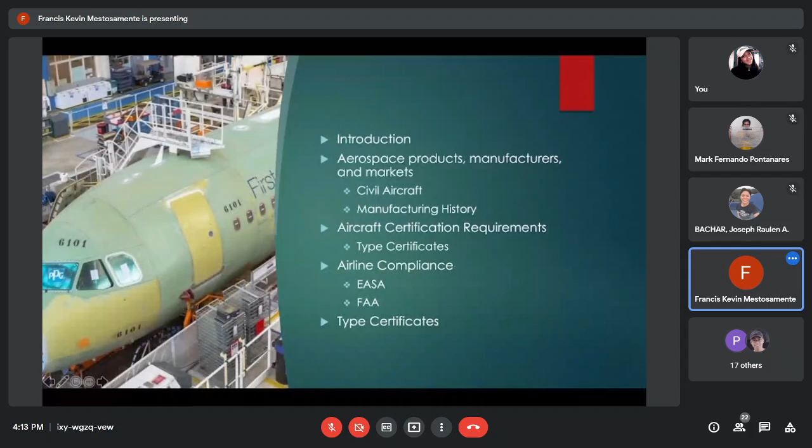We have our next slide here. Basically, we have the introduction focusing on this module - a summary of the current production of aircraft. We'll be focusing on production, specifically production points, in a few main things.

Current innovation of the aircraft - how currently our aircraft evolve. As you could see, our technology is evolving rapidly, especially in our generation.

The current market is also unstable, especially now that we've encountered the pandemic, which is very critical for the aviation industry. And of course, one of the most important factors will be the business model or the demand of the certain company or the certain airline.

So business model varies from company to company. They have their own goals and they have their own processes on how to achieve their goals. And of course, this airline company will take a toll on us or affect the current aircraft production. So the aircraft produced by our production companies will be for our airlines, or specifically, mostly for commercial purposes.

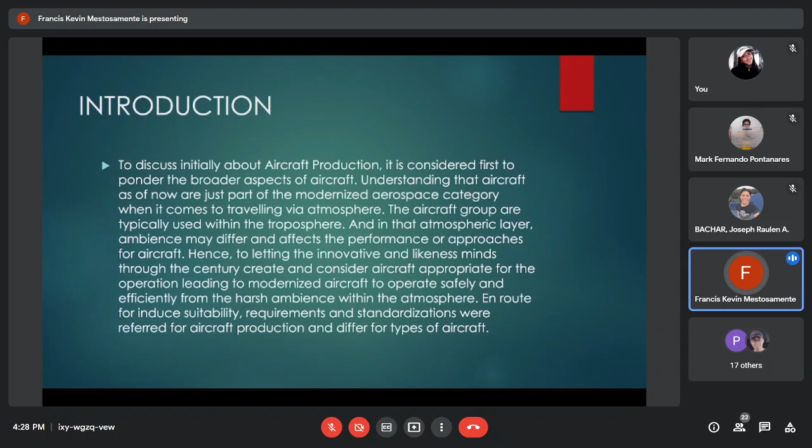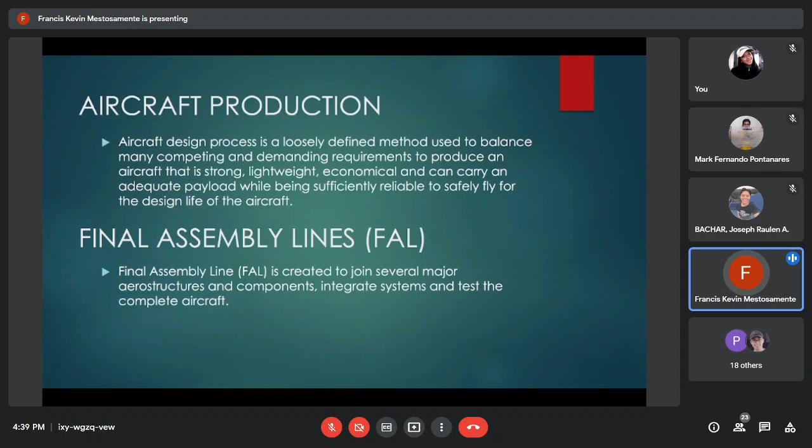Okay, let's take a look at the A350 final assembly line process. We'll be focusing on the final assembly line process, the last assembly line process where they combine the components coming from different factories of Airbus and different warehouses.

The final assembly line deals with fairly large components since it's the last part of the assembly line process. Each part transferred here has its own assembly line process. For example, the wing of the A350 is transferred to the final assembly line, but the warehouse or production process it came from has its own assembly line specifically for producing that wing. Today we'll focus only on the final assembly line process of the A350.

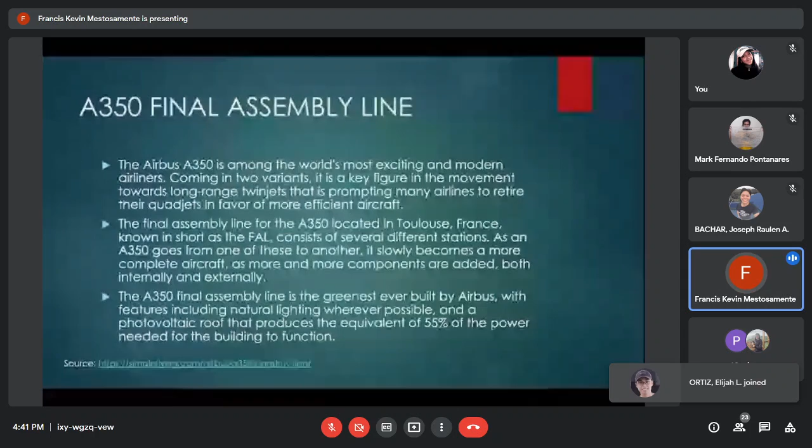The A350 is one of the current trends in aircraft today, one of the more modern aircraft with two variants. It's a huge technological advancement since airlines now favor aircraft with only two engines. Before, large long-haul international aircraft used at least four engines, but today with the A350, the aircraft is much more efficient since we use only two engines for a long range or long haul flight.

The final assembly line for Airbus, and specifically for the A350, is located in Toulouse, France, since the main Airbus company is located in France. It consists of several stations, which we'll discuss in a minute, where components are slowly added internally and externally to complete the aircraft process.

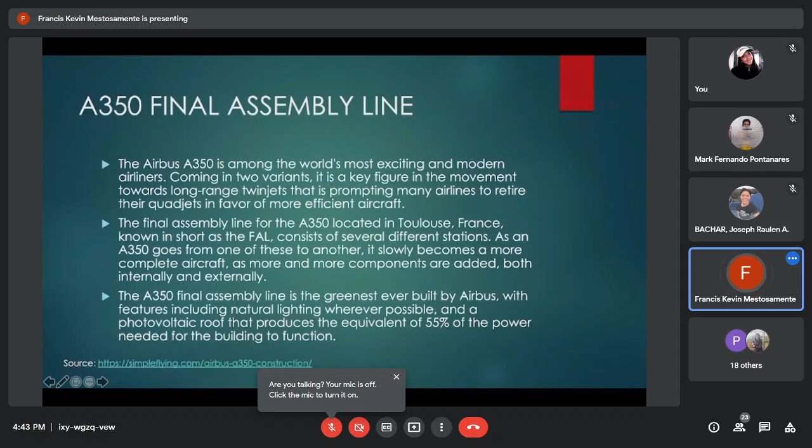Let's take a look at the process of the final assembly line for the A350 so we have a better idea. The A350 final assembly line process starts with the arrival section. In the arrival section, the large components I mentioned will come from different locations and different companies if there are third party companies. This is the first process of our final assembly line.

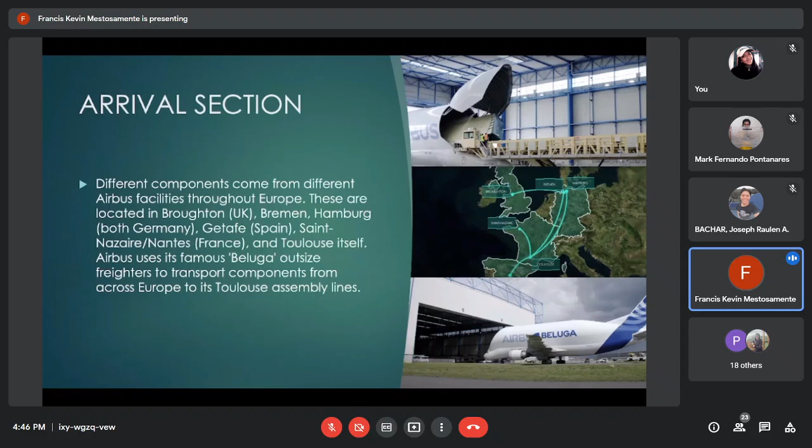We attach several parts of the wing before it is sent down to the final assembly line. So there we go, it's a two-way process. Unlike the others, after their assembly line, they brought it down directly to the final assembly line, or FAL in short, FAL of the A350 in Toulouse.

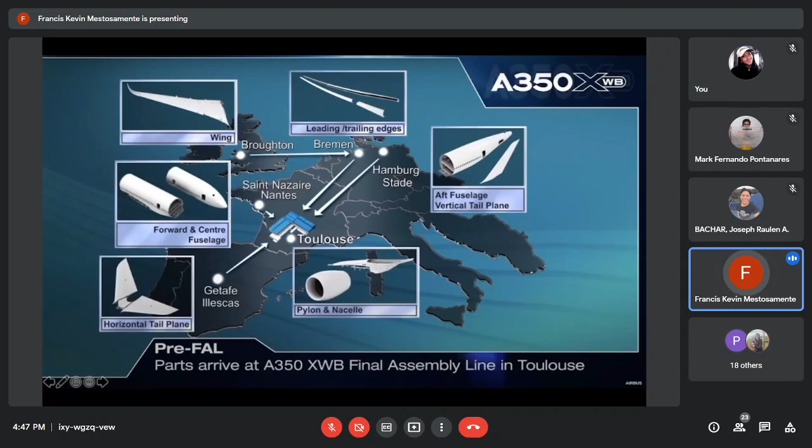Moving to the next slide, our first station for the A350 is where the parts will be passed. The first station will be Station 59. Here we install the modules of the fuselage and/or monuments, and of course the different bigger components of the aircraft.

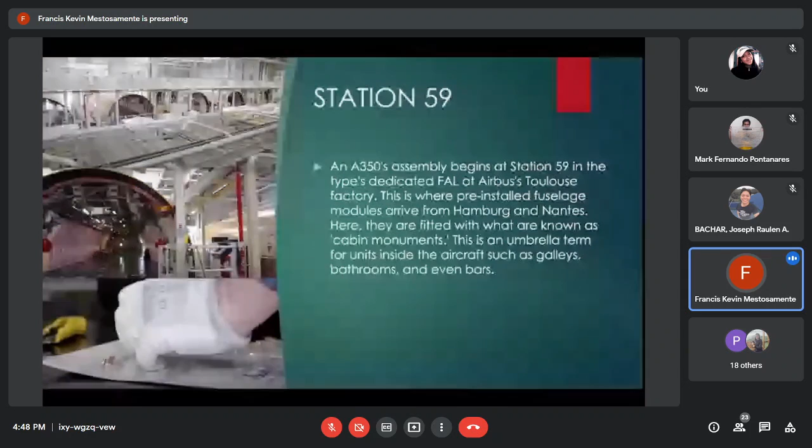What I mean by monuments are the parts specific to that aircraft and specific airline, the large parts of the aircraft that are there permanently. With monuments, these are parts of the aircraft that you cannot dismantle, they are there as a whole. So this is the first thing we install at Station 59.

Their goal, specifically, is the monuments, and the second goal is the outfitting process. The monuments include the galley, washroom, and crew compartments, also the dividers per class of the aircraft. These certain parts are there as a whole and permanently, which is why they prioritize them, putting up the washroom, the whole compartment, first.

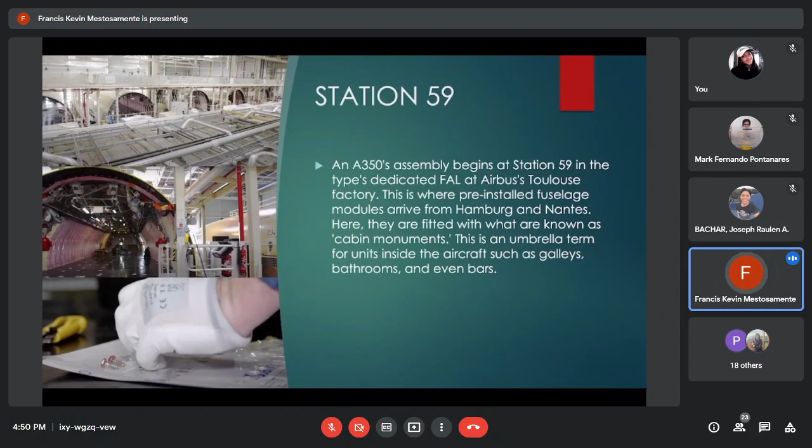Then they will also start the outfitting process. In outfitting, the lines needed throughout the aircraft operation come in. Since these lines will be within the aircraft structures, that's why they come first. The outfitting process includes the hydraulics, water system, oxygen system, air conditioning system, wiring system, and some of the insulation placed on the minor parts. So this is Station 59.

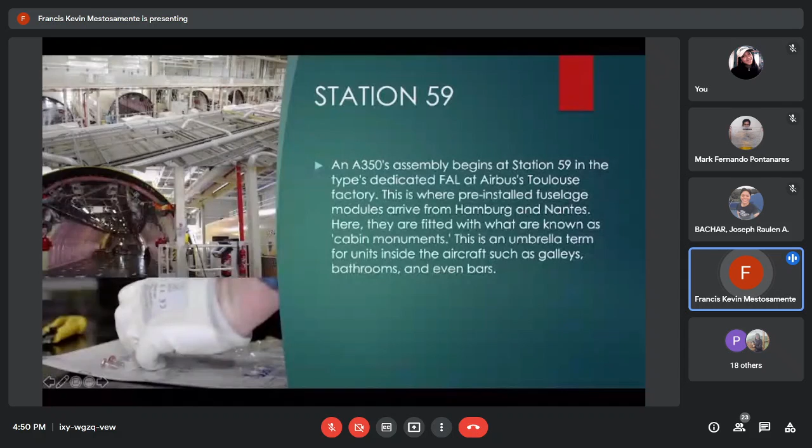Monuments and outfitting process. You can also see here, in the first picture, the fuselages lined up for the outfitting process and monument installation. They do this at Station 59 to be more efficient in producing numbers and to speed up production, with the aircraft arranged in parallel to minimize production time and improve workflow.

So faster processes. In the second picture, we have a quick look at some workers doing the outfitting process on a certain fuselage. Usually it takes 40 workers handling per fuselage on average, and each worker has their own specialty: a team for hydraulics, a team for wiring, a team for the monuments.

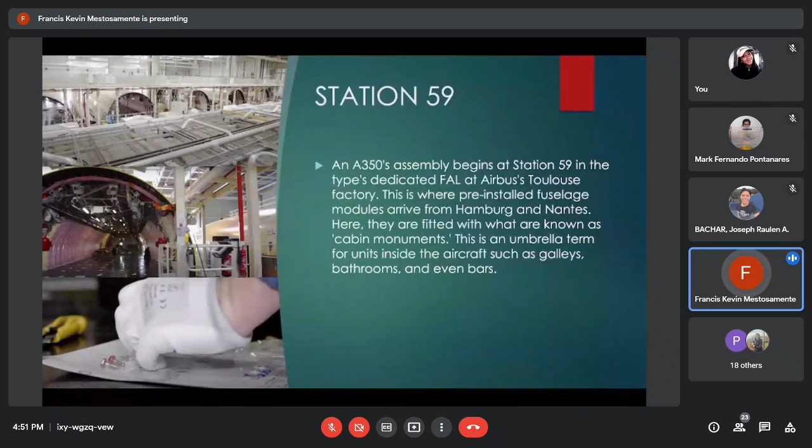So that's Station 59, monuments and outfitting. Cabin monuments installation and the outfitting process. These are the permanent parts where we cannot dismantle the monuments. This is one example of a monument on the aircraft, one of the first things installed, and as you can see, it is there as a whole.

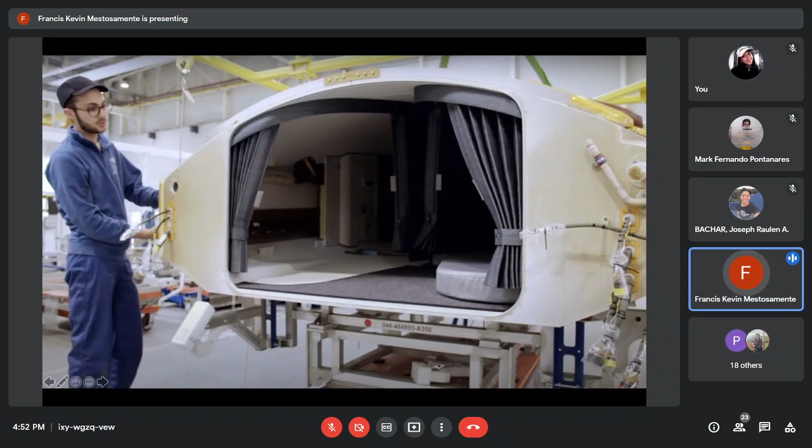We have, I think, a crew rest compartment provided on the top part of the aircraft for long haul flights, since there's a need for crew rotation. The crew who will rest stay here to take a break, to take a quick nap on long haul flights. So this is one example of monuments, installed there as a whole.

Moving forward, we have our next station, Station 50. The major thing they're doing here is the structural fuselage join-up. They combine the three parts of the fuselage: the aft, the forward, and the center, joining up the fuselages from Station 59.

Before they join up the three parts of the A350, the outfitting is already ready. The things I mentioned, hydraulics, water, oxygen, wirings, electrical, are ready by the time they join up. So once joined, the outfitting is also ready as a whole aircraft, and this is where the aircraft takes shape, visibly becoming an aircraft.

Some call this the marriage process, since we combine the three parts of the aircraft: the nose, the mid, and the tail or aft section. The joining is processed by hand and riveted. They use a lot of rivets in the joining process, of course using aircraft-grade rivets, and it's performed by professionals, specialists in the riveting process to form it correctly.

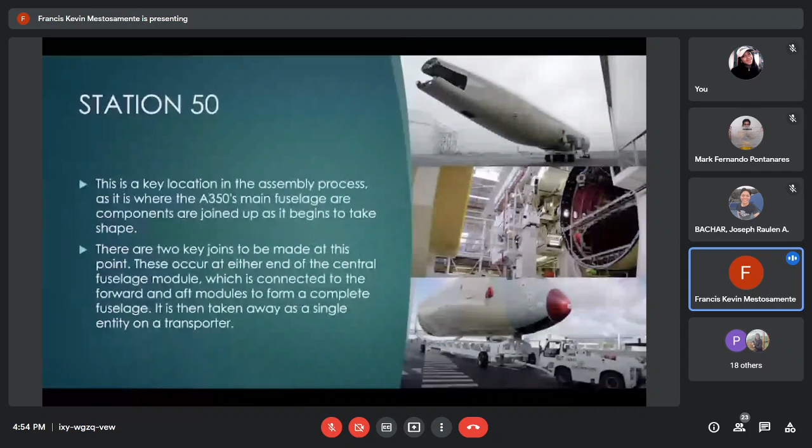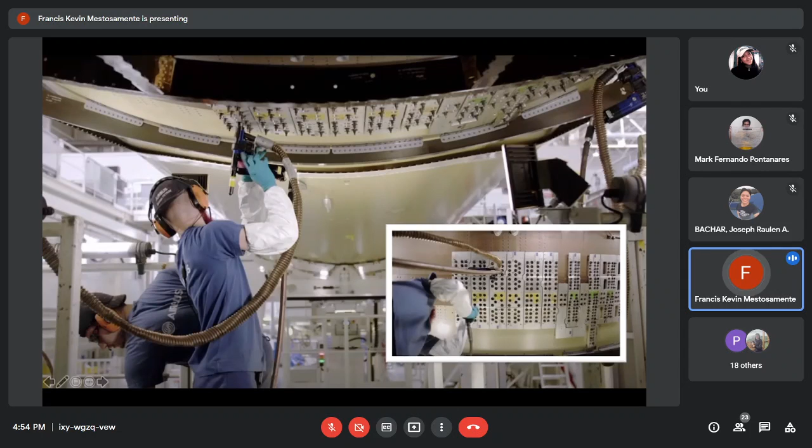So there we have a very big picture here showing two personnel working with the riveting process. As you can see, they process the riveting here at the fuselage join up. You could also see here a different angle.

That is aircraft grade rivet, not the same as the traditional home rivet you see in hardwares - this is a different one. So this team is specialized with the rivet assembly since that minimizes production time, as we are adapting the assembly line process.

Next up will be Station 40, where they attach the wing to the fuselage of the aircraft. I forgot to mention with Station 50, the fuselage joint, they also attach the nose landing gear of the A350. Together with the process, they attach the nose landing gear during the join up of the three parts of the fuselage, so they can tow it to Station 40.

At Station 40, the main thing here is attaching the wing, and this will be the first power on of our A350. With the wing, not only the main wing, but also the horizontal tailplane and the vertical tailplane are attached here. They'll also be attaching the tail cone at the very end of the aircraft. Since the tail cone usually houses the APU, if I'm not mistaken, once they attach the tail cone together with the APU, the auxiliary power unit, they can provide the first power on of the aircraft.

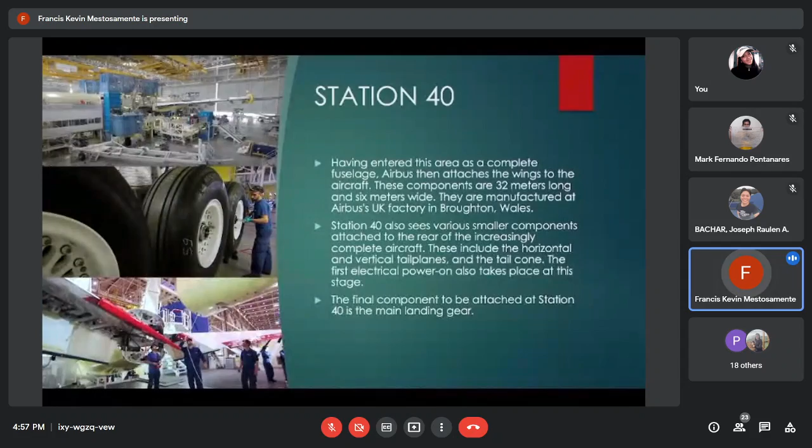Take note, at Station 40, as I mentioned, they attach the horizontal and vertical tail plane. With the vertical and horizontal tail plane - I think I have a picture later - usually the tail plane is pre-painted. With the painting process, they have problems with the height of that specific tail plane, so sometimes they attach it already painted. Take a look at this.

So here you can see the tail plane attached. We already have the tail cone attached, the wing attached on the A350, and you can see the tail plane of the A350 being attached already painted. Since this is the highest part of the aircraft and they have problems painting this part, they pre-paint it before attaching it to the aircraft.

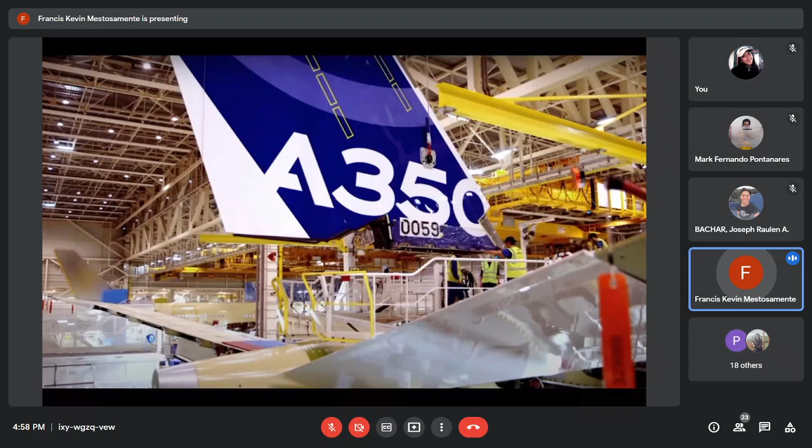And that's it for Station 40 - 90% finished is the aircraft. Next up is Station 30. With this station, the main thing they'll be doing here is the cabin installation.

With the cabin installation, the major focus of Station 30, this team is quite versatile since the cabin installation differs from aircraft to aircraft. Since each airline order has their own cabin configuration needed and wanted, they have their own customization depending on their business model. So at Station 30, what they do for cabin installation varies.

And they have specialists for every task at Station 30. So they have here an airlog center for Airbus, where the interior parts, cabin interior parts, come from - also made from different companies or different countries.

So in this middle picture, that's our example of the airlog center - they'll be getting the seats needed for that certain A350, certain airline, and certain aircraft.

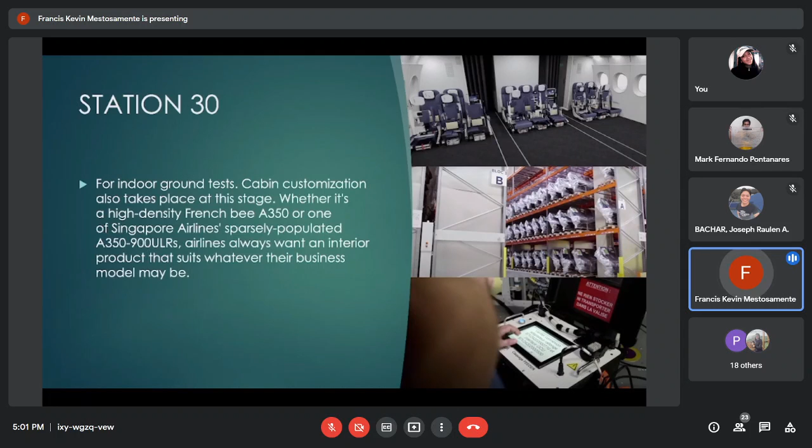Station 18. So with the previous station, first power on, they also perform indoor ground tests since the aircraft already has power. Next up is station 18.

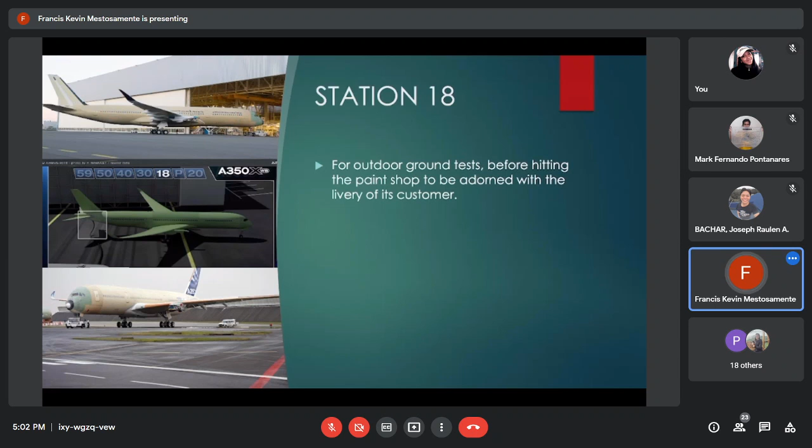You could see here that sometimes the tailplane isn't pre-painted, but on the other hand, in this picture it is painted. So it depends - they adapt with the schedule for the certain aircraft, and of course the demand, since they follow a schedule from the airline. There we go, we have station 18. So they bring it out for outdoor ground test before transferring to the painting process.

So here, self-explanatory, painting. They coat the aircraft with the correct paint for the airline. Depending on which airline it will go to, sometimes it's already pre-painted in the airline's colors. Sometimes not - some airlines have a separate painting process. But still, they will have to paint it here.

The Toulouse factory is equipped for every painting process required by the customer or the airline. They have a lot of operator support functions for the painting process. Usually it takes around 5 coats of paint per aircraft, and they use an electrostatic spray system to distribute the paint evenly on the aircraft. So that is the painting section.

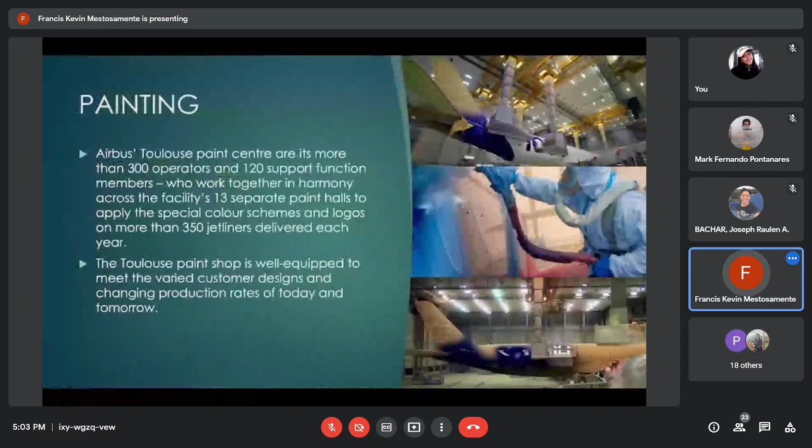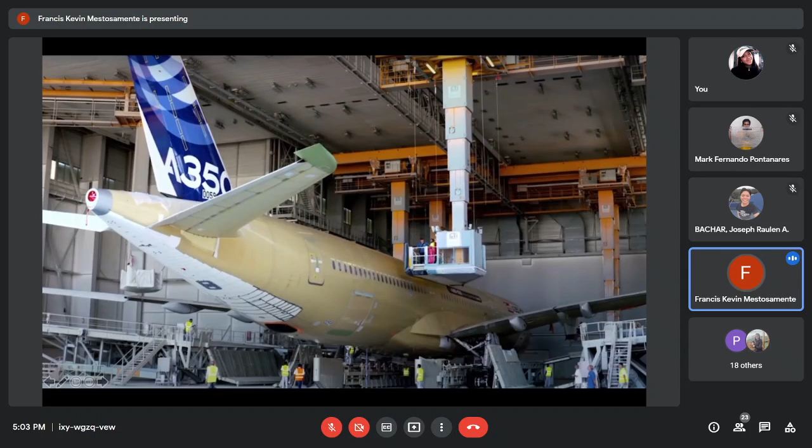And the final - here I have a picture of the A350 being prepared for the painting process. You could see how high the tailplane is, which is why sometimes it's pre-painted. You could see them preparing for the painting process. And the last station will be station 20, which involves engine installation and of course the finishing of the cockpit.

It's a pretty big job, putting the engines on both sides of the wing. They'll also have minor adjustments here, checking the cabin again for quality control. Since this is the last station, they will also have quality control here, checking for damages and scratches on the aircraft.

The customer, the airline, pays billions of dollars for the aircraft or for the contract. So it's very important for Airbus or the production company to present the aircraft as perfect as possible to the airline. So quality control checks and finishing off the cockpit.

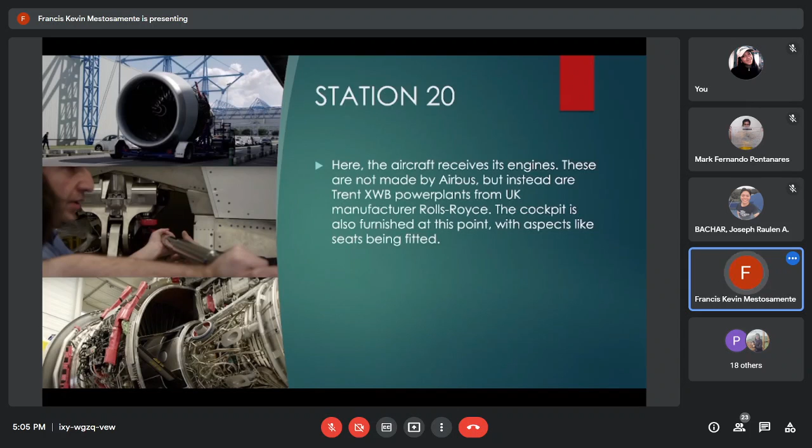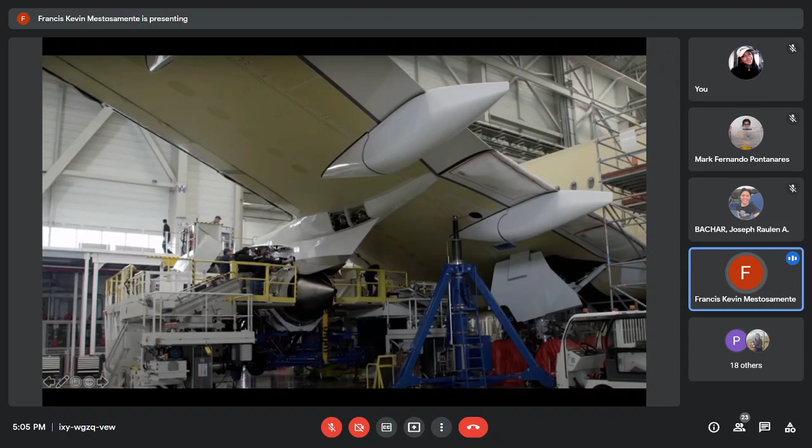For the specific model, the A350 is manufactured with engines by Rolls-Royce. And here we go, we have station 20, the last station for the aircraft. We have a picture here of a power plant team installing the engine on the A350. And there we go, we have a quick preview of the A350 assembly line, final assembly line process.

So next up we'll have our aerospace products, manufacturers, and markets. This is pretty self-explanatory - if you've already read the modules, you could understand easily with this specific topic. So we'll have a quick preview of the products, manufacturers, and markets, and also a quick preview of the history.

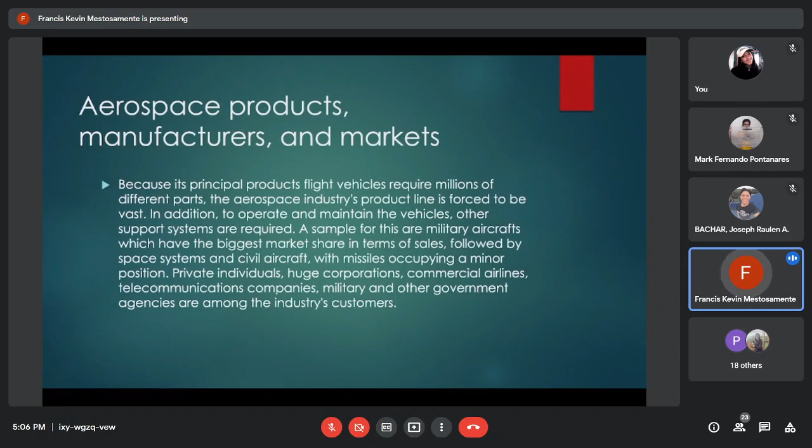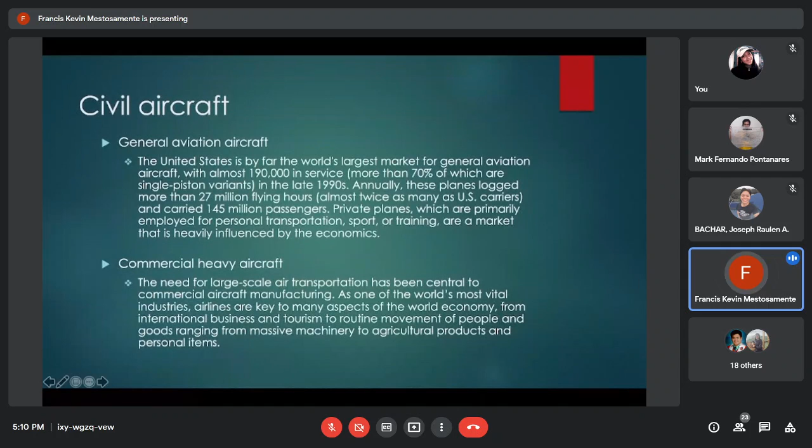Next up is the commercial heavy aircraft, where our airline companies come in. Also another big part is the military aviation. As I've said, some of the commercial production companies, Airbus and Boeing, are also leaning towards military aircraft production.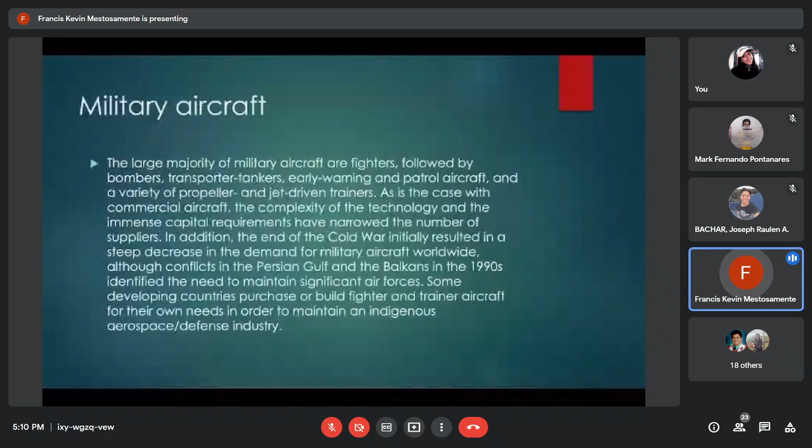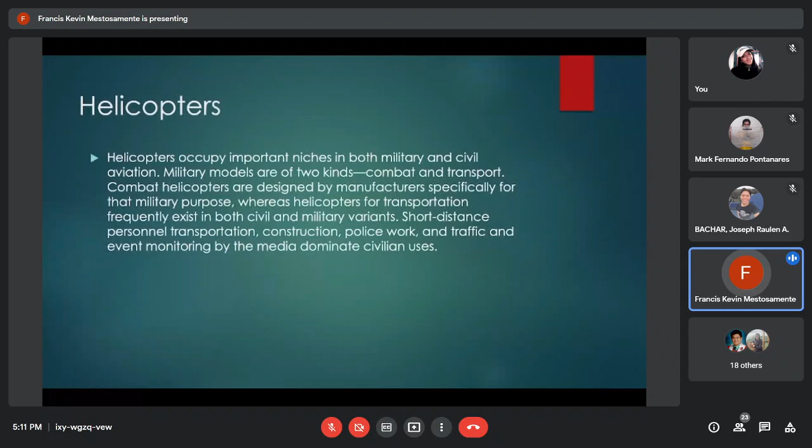Of course, we also have demand for helicopters or rotary wing aircraft. I guess we have certain companies specialized in helicopters, since we also have demand for them. Another one is the UAV, or unmanned aerial vehicle. From today's aviation, technically the demand for UAVs is rising, with the drones.

And I'm not referring to the drones that you buy from the malls. I'm referring to the drones used for agriculture, major site surveillance, construction. So many industries are already using UAVs for their business—construction, agriculture, and also military, a big part of the UAV industry is our military side.

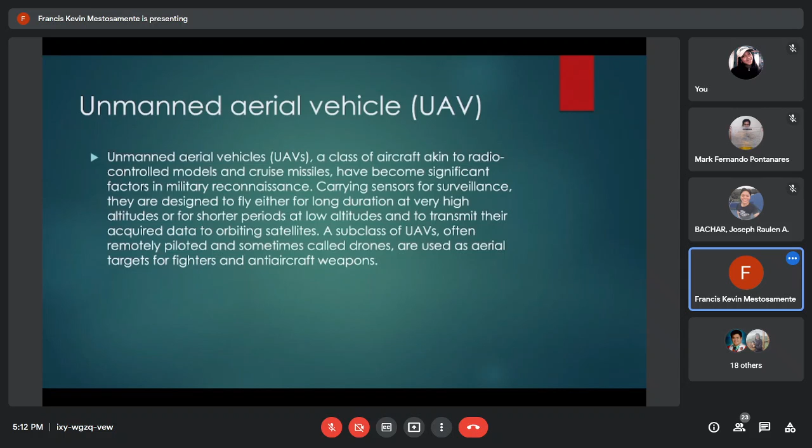And there we go, we have on the module a short history of manufacturing, if you could take a look. This is self-explanatory, and for that I think I've already consumed an hour of discussion. So I guess we'll stop here.

History of manufacturing—we'll be continuing next week for airline compliance, focusing on EASA and FAA. So I hope you have some information captured, especially on the assembly line process or the production process.

of Airbus. We had a quick visualization of how the process happens. So that concludes our discussion for today. We'll probably have, and also take a look at the video from earlier.

I have a YouTube video, you could have a quick look there, a 10-minute video. I think that's on the first slide of the presentation. The link is there, the title is also there for you to have a video representation of the A350 process.